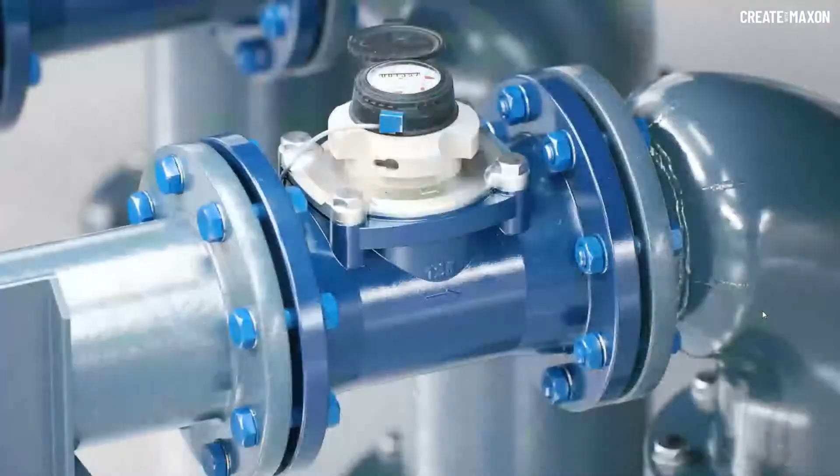Yeah, okay, that's it. I think what you can see here is that we are covering a big variety of things. Like you saw some Lego stuff we do, and then this photorealistic stuff, some commercial stuff. But I think what's most important to say is that all of these projects are commercial projects. So we are very focused on doing commercial projects. It's not that we have a lot of time to do spare time projects.

So our credo is learning while earning, to call it like this. And so we are always trying to get better with every paid project. I think that's a good way to go, because it's always good if you get paid for something and also can deliver great stuff.

So before I start with the topic today, we can switch to the presentation here. As you can see here, the topic today is interior rendering from concept to photorealism. And what you can see here are just 4 images we did in the last months and years, especially for architectural stuff. And I will show you some tricks for how you can achieve this kind of quality, or how we approach such an image.

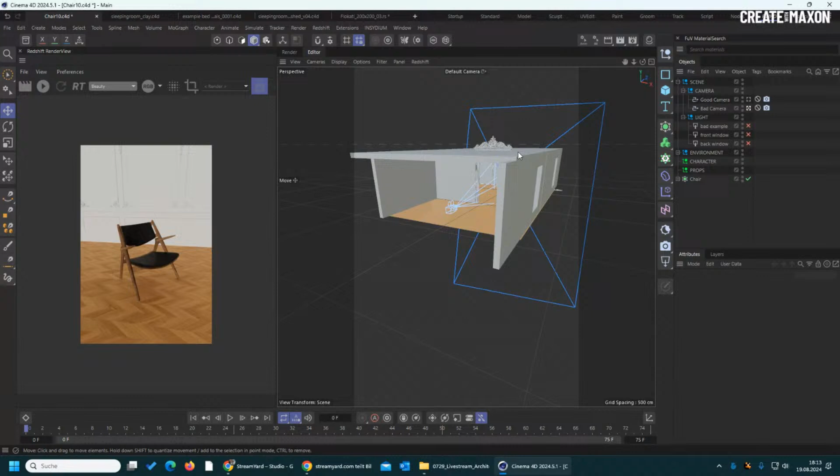So let's switch over to Cinema 4D so I can show you what I mean. I prepared a very basic test scene here. You can see it's more or less kitbashed together. You have some ornaments here, I just downloaded them from somewhere. And we have the door here, and I placed this wonderful chair right in the middle of the room.

So in terms of composition, if we now try to make a good composition just from this chair, I said okay, we can go with a bad camera. I would call this one a bad composition. It's not showing anything, it's like the standard focal length of 36.

If you open scenes from other people, you always see they don't even care about the focal length. They just keep the standard, and that's it, and then place it just somewhere so you see the chair. That's it. And if you now hit rendering, we don't have light here at the moment.

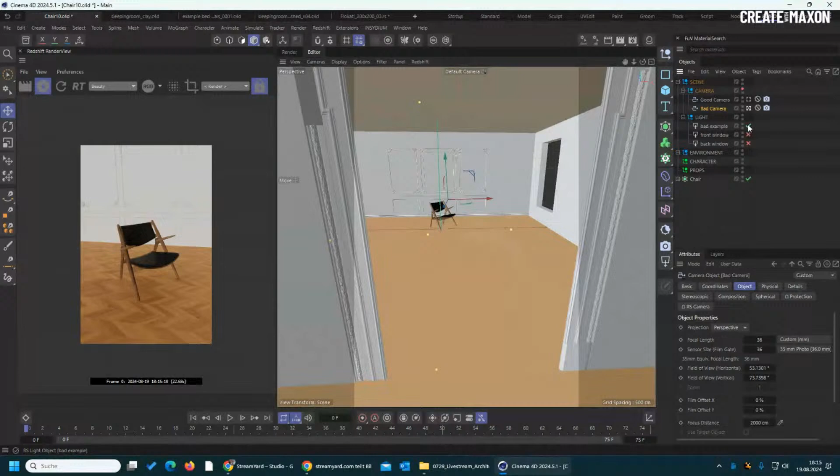The recipe for the perfect bad lighting is to put it right in the back of your camera. So I prepared this here as a bad example. At the moment we have our camera, and the light is coming right from here, mainly directly from the back. What you can see now is we don't have a really good perspective, and we don't have good light, because we don't have shadows - the object is covering all the shadows we get, since the light is coming right from the back of the camera. That's not what we are aiming for.

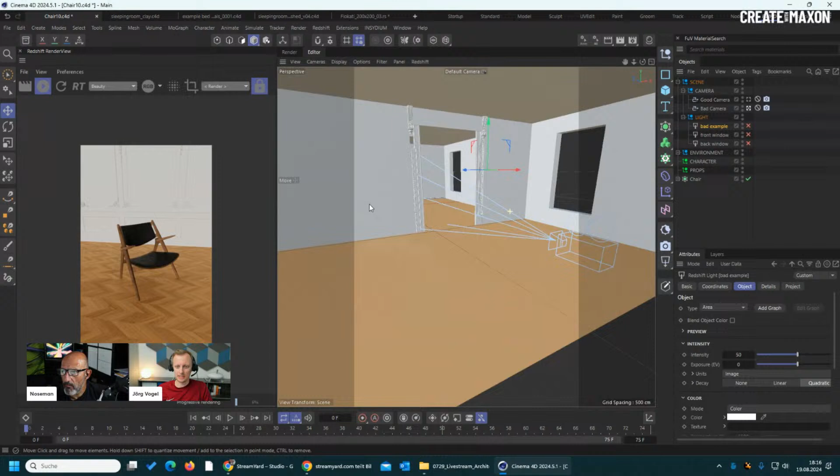So let's go back and think about what could be more appealing. A good way to get a good product shot, first of all, is to have a bigger focal length. So when we start here with a focal length of 150 millimeters, for example, and get a little bit of the door frame here in the front, we get some depth of field, some depth into the image, and it's looking quite more interesting.

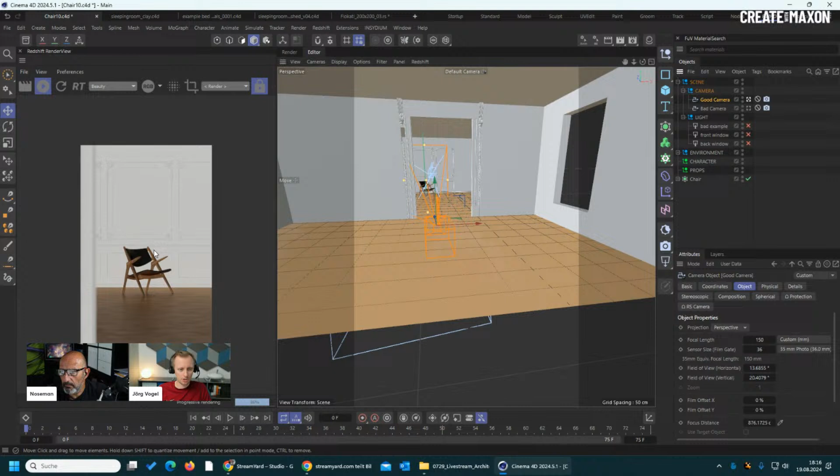What also helps here to get to those perspectives is using the composition tab. You can enable, for example, a grid, and you can center it somehow, or use a golden section or triangles - no matter what, just some helpers that can help you get to an interesting composition.

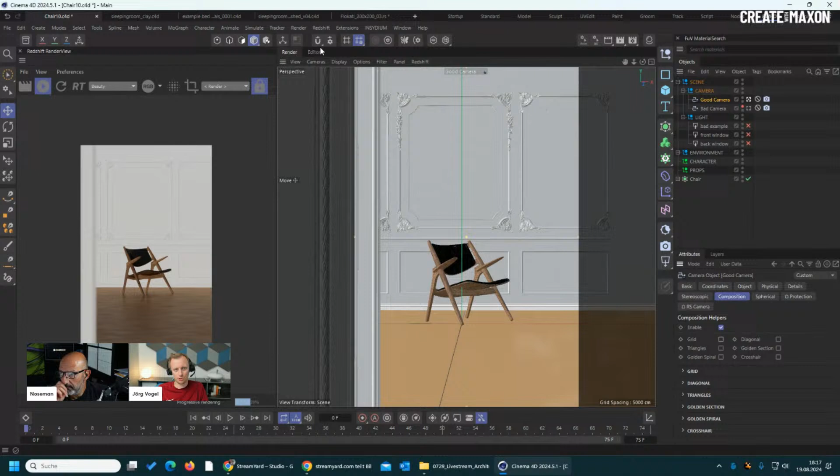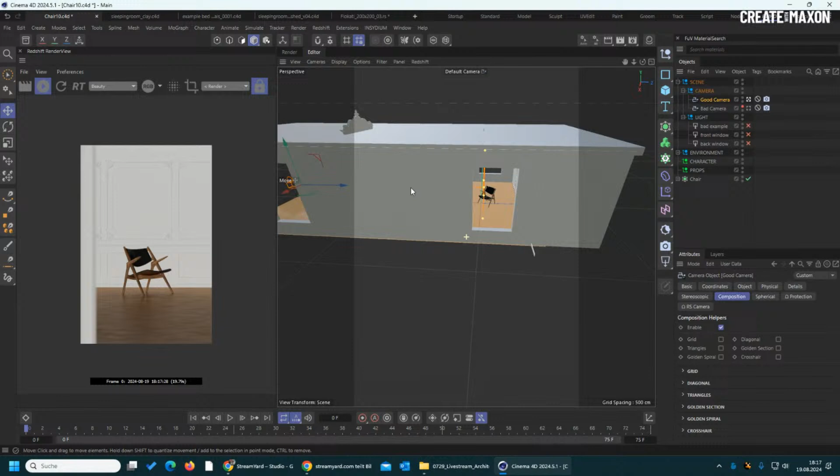So now we have this. We have still auto light, and now what we said is point 2 after the composition is the lighting. So what I did here is we have a window directly from the side, and I'm not telling you that you should always put a light from the side to your object, but it's always a good starting point not to put lights somewhere randomly, but put it 90 degrees to your camera.

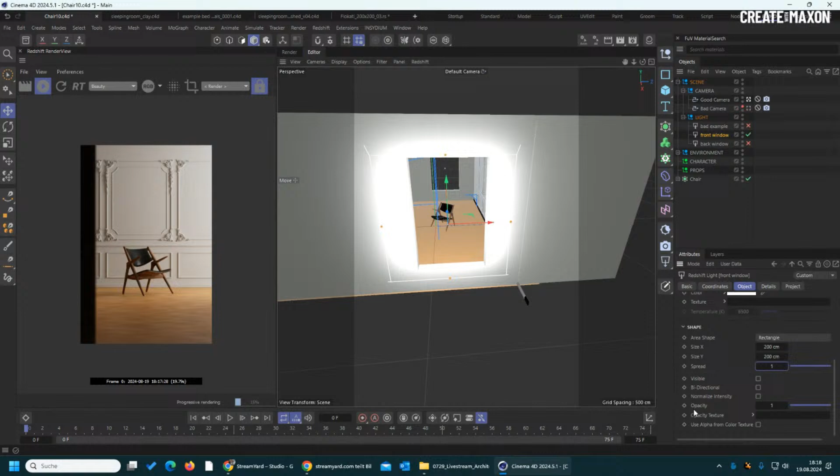This is just a safe way to do something, because most of the time it will give you a good starting point. So I will just turn on a light, an area light. It's nothing fancy, it's just an area light with a spread of 0.5 instead of 1, so it's more focused on the chair, because the spread is not so wide.

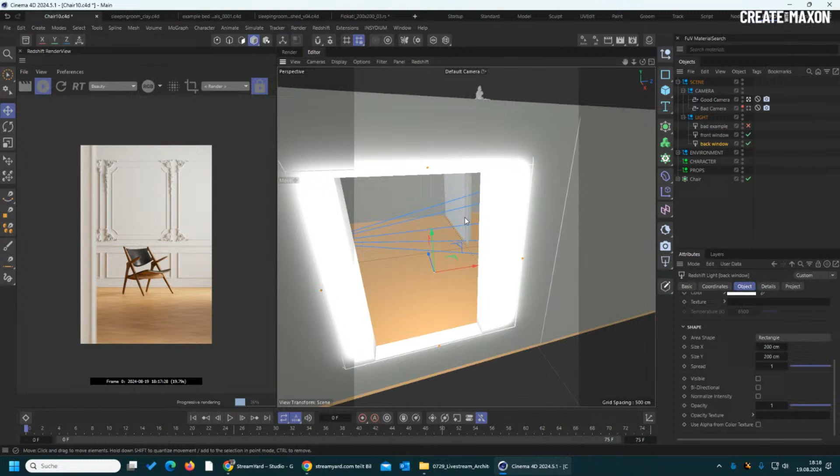We can do it like this, and now you see, okay, we don't have any light in this room, so it's a little bit dark. So we have another light coming from this window, and it will make this room brighter, and we'll end up with a good composition and lighting.

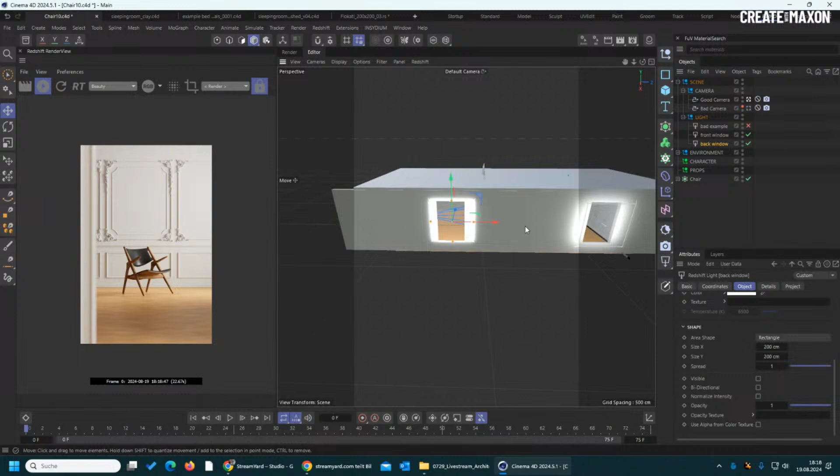It's pretty simple - good lighting doesn't have to be very complicated. It's just 2 area lights, a room with, or 2 rooms with 2 holes - you see it's even open here on the back. I think it's really simple, and you see what's the magic about good composition and good lighting, because it's the same exact object, but you get a completely different type of quality image out of it.

So far for this one - this was a little bit more overall. I will now switch to this bedroom scene we saw here at the beginning, and just want to show you how we proceed with such a project.

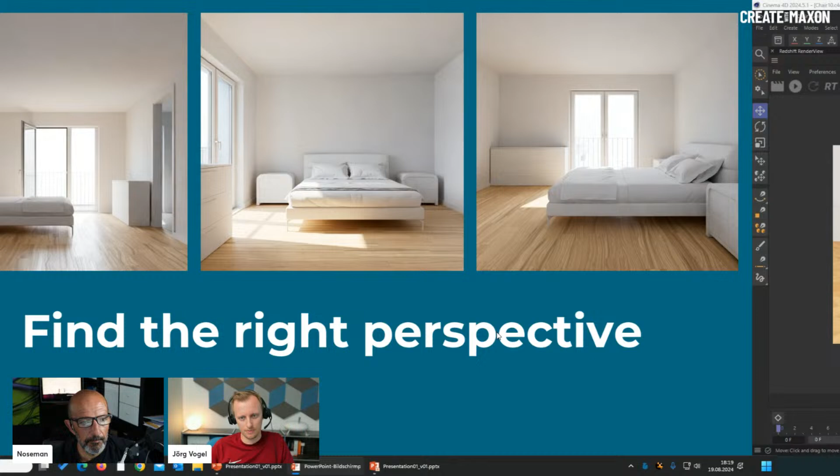Let me switch over here, and we will just start over with a blank scene. I will really show you the basics how we work here. Normally when you start, you need something like a blueprint.

You can just go to your top view, for example, and go to the viewport settings with Shift V, and then go to back. Here, let me just go to this texture - you can just put in some blueprint I prepared, and here you go.

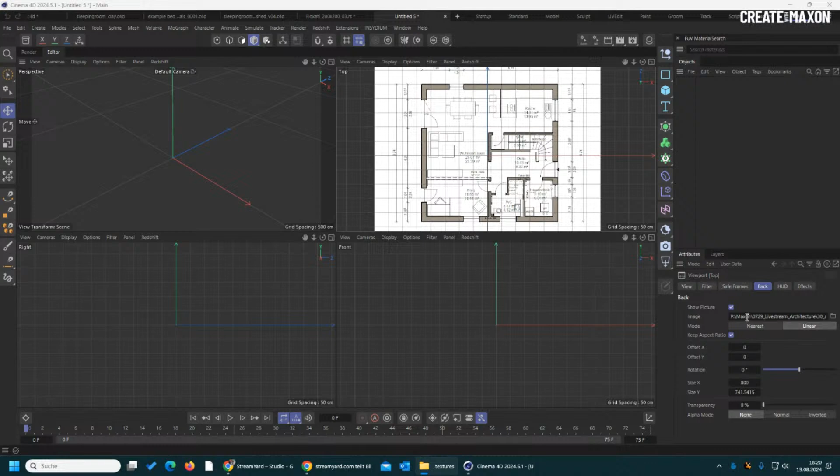Now you can just model your stuff. The problem is that the scale is incorrect. For example, we have here 9.74 meters, so if we just type in here 974, you can see it's totally off scale.

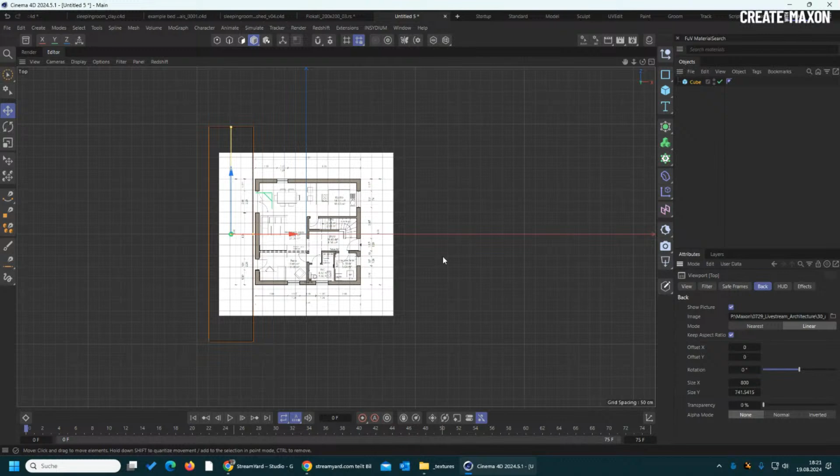We can now go here and adjust the size and the offset, for example, but we find this really annoying. So what we did is, let me just remove this one here.

We have a plugin written, it's called the Blueprint Importer. You can just switch the standard alignment, say put me an image into the luminance channel, and also which type of material you want to use - I would just use the old Cinema 4D standard material.

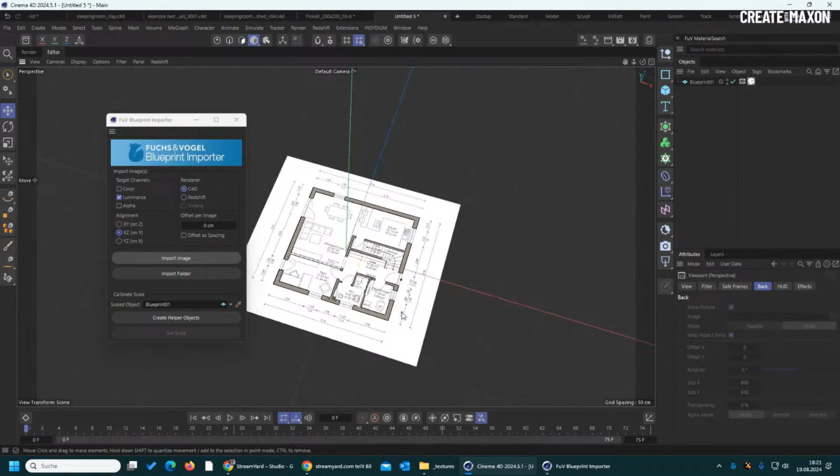Then we go to import image, and here we have the blueprint. Now we have a plane here with the material attached with a display tag, so you can also see it in the top view, for example. It has an override here for constant shading.

But we also have the problem here again that it's not scaled properly. Here we have the create helper object - you can see it's just a null object that appears here, and we can just set it somewhere here, and set this one to here.

So we have now measured the distance here, and then we say just set scale and set this to 974 - I think 974, and that's it. We can just check it by putting a cube here, and you can see it aligns perfectly.

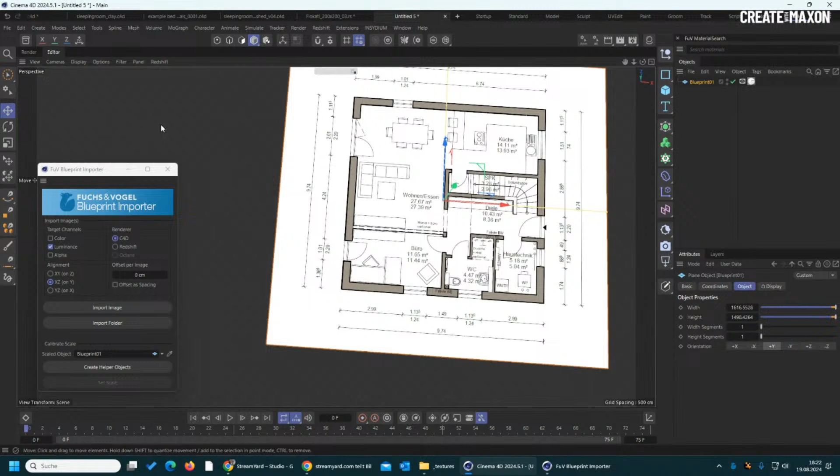So that's step number 1 to start with the modeling of the room. I won't show you how to model everything here - I would just show you how we would build one room, for example, because most of the time you won't show everything. It's more like, okay, let's show the office or the dining or the kitchen.

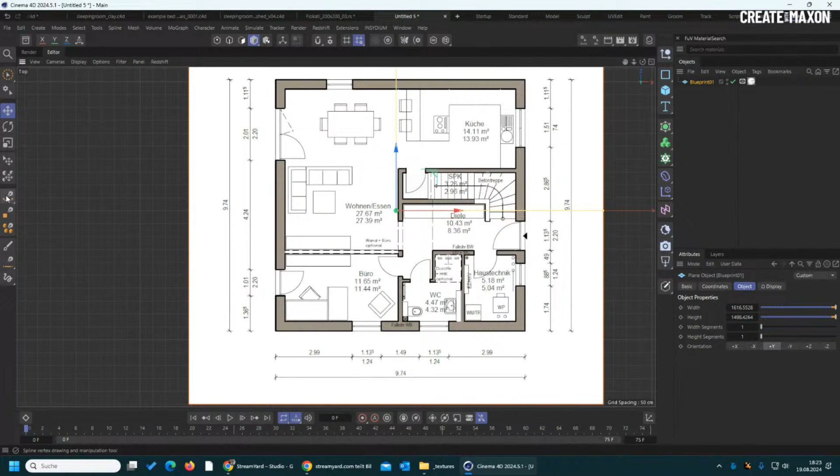So we just do it by creating some spline here, really rough, go to the edges here and close the spline. What you can see now, it's not perfect - you don't have 90-degree angles here.

I think the fastest way to align them is just to copy 2 of them and then scale them - like you click on the smallest one and scale them down and scale them here. As far as I can see, I was pretty good with those 2 because they are already 0.

You could also use the scale tool, for example, just scale it down to 0. Now you have perfectly aligned 90-degree angles - that's really good, that's what we want to have. And now we can align everything here.

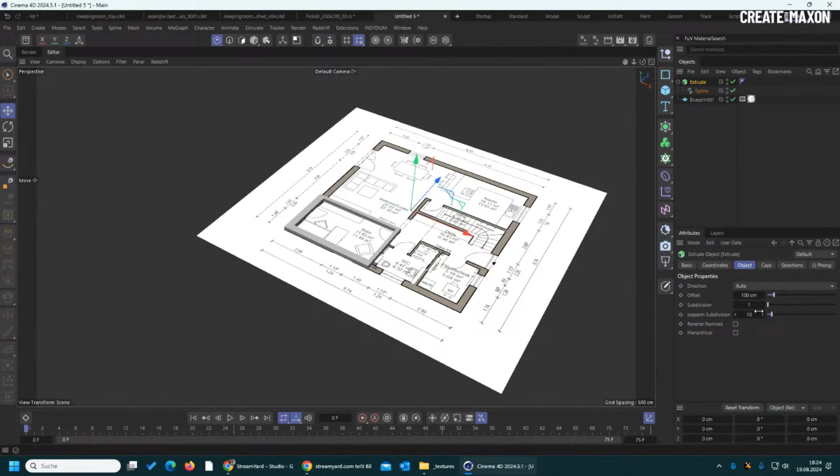Perfect, then we can create an outline. Just need to adjust it here a little bit and here a little bit. And that's it - let's put this into an extrude NURBS, and let's say we have a height of 270 centimeters.

What you see now is it's facing in the wrong direction, but that is not really a problem because we can just reverse the sequence of the spline, and so we get it in the right direction.

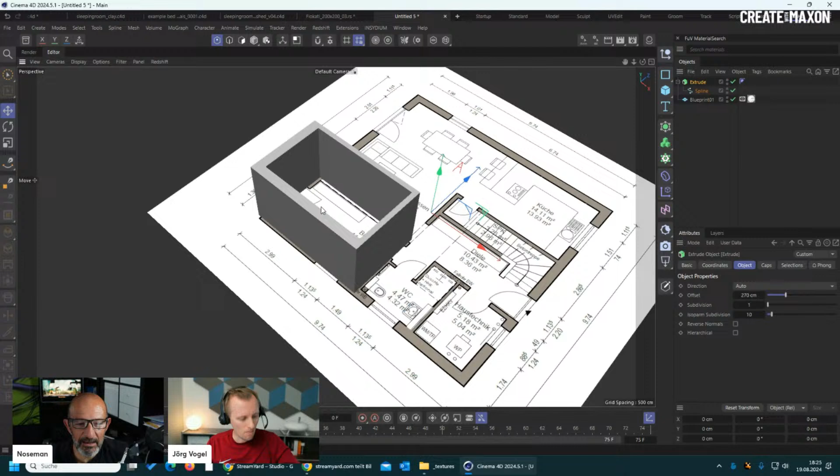One interjection here - whenever someone says to our viewers, I'm going to put it into an extrude NURBS, that means they've been using Cinema 4D for a long time. That's my comment. Yeah, I'm old. I'm trying to get used to the new terms. Okay, so I'm using an extrude. Yeah, great.

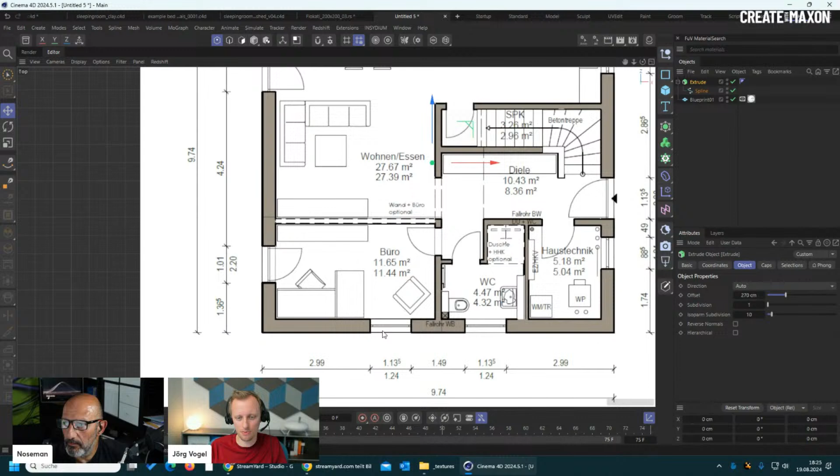So what's the next part? The next part is to put in some holes into the walls, like for the windows. I think we have a door here, and this is also a big window, like a door. So we just get a cube, for example, and we see here that it has the size of 101, and I think the other one should be the height, so it's 220.

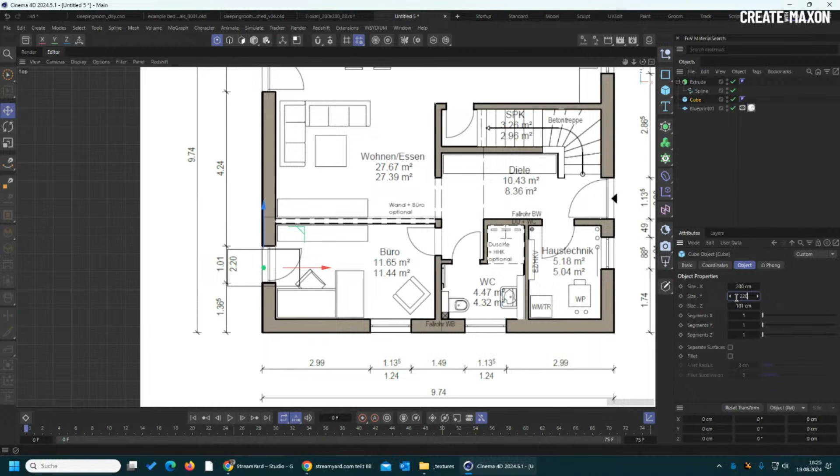And what you see now is that it's not aligned to the floor.

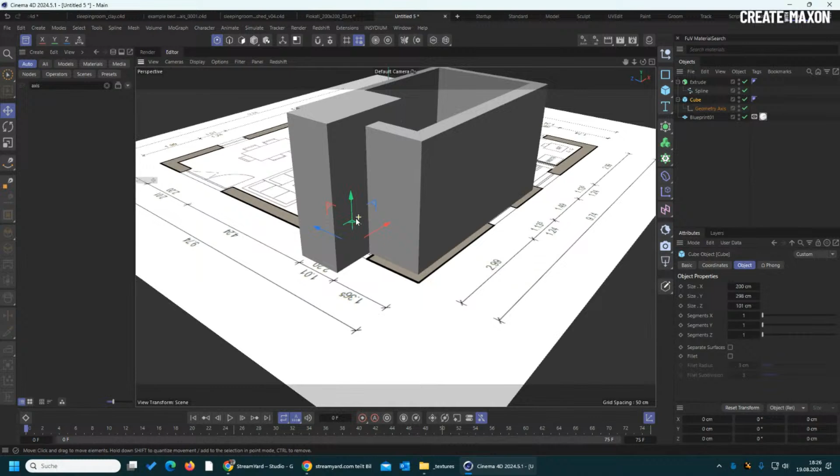So when I'm doing this, you can see it's always spreading in both directions from my axis. So there's a really handy capsule you can use, it's called geometry axis. When you put it here, you can just set the y-axis, so it's just an offset for the axis, but you keep your cube editable, so you can now just adjust the height without moving the cube in both directions. That's really handy for something like this.

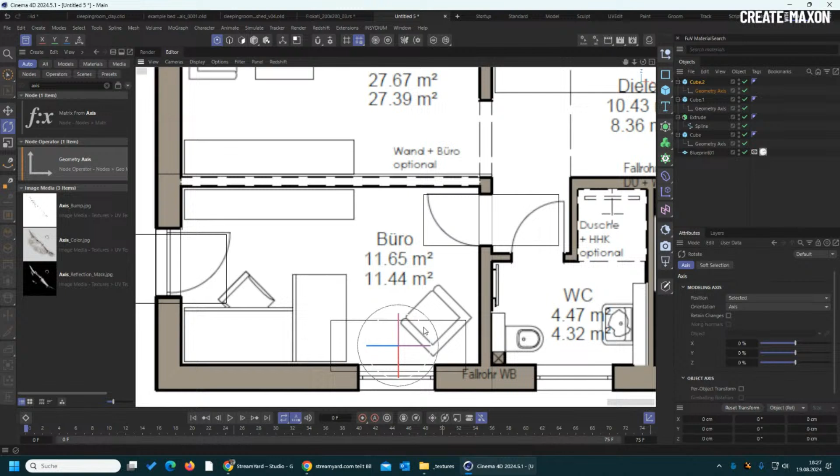So we have this door here. We have the door, I think it's around 75, if I'm right. And the height, we can just leave it, we'll just make it a rough model. And again we have here something like... I don't know, I think that's it. And in the height we have 124.

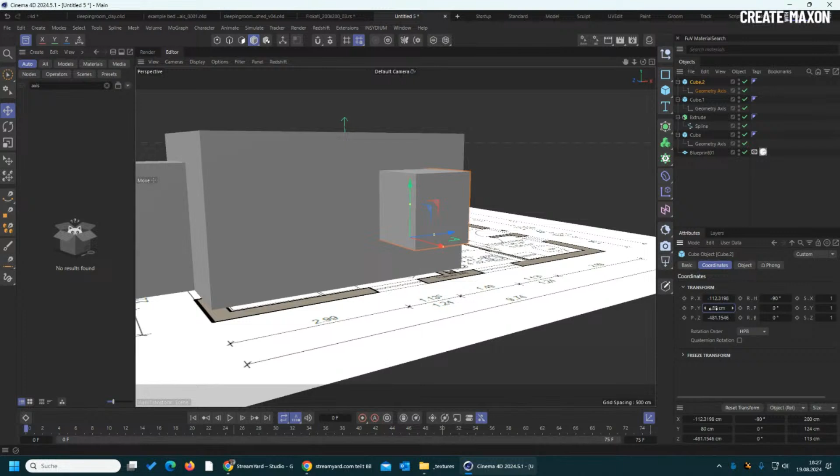Exactly, and I think the window will be at a height of around, I don't know, like put it on 80 centimeters. That's also really handy with this axis too, because you can just move it from the down part of the window.

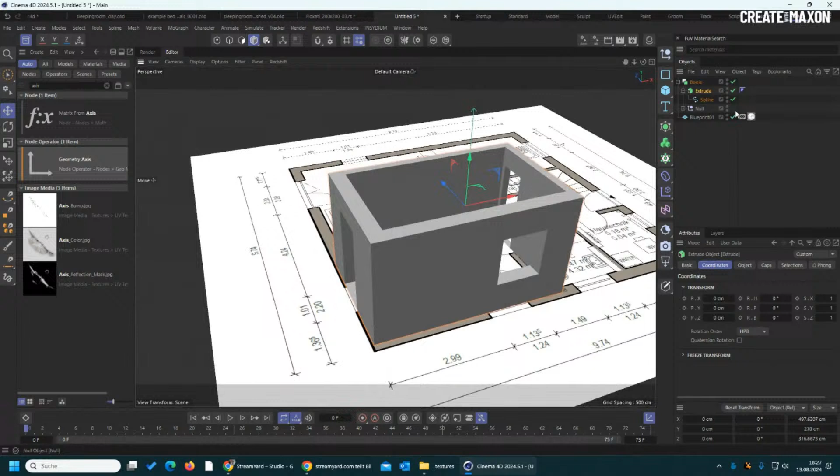So we now take a Boole, and we can just group all the windows together, put them here, and put the rest here, and there we are. I would just pull them a little bit down, so we have gaps in between those doors here. So that's it for the holes, and then we can just proceed with some.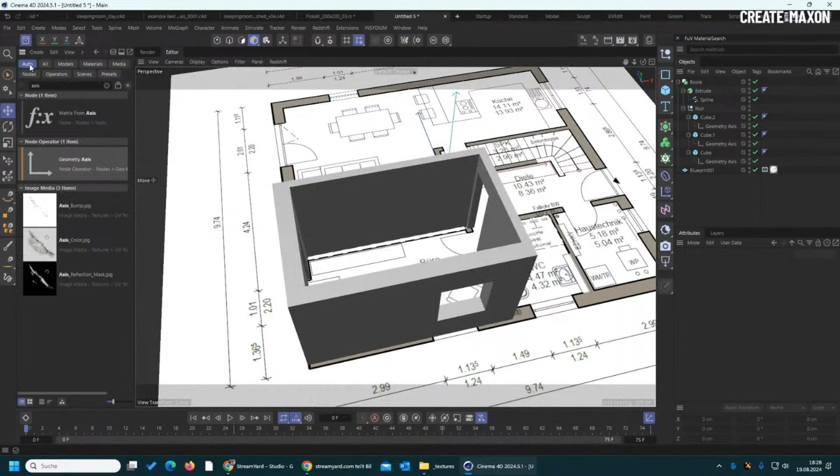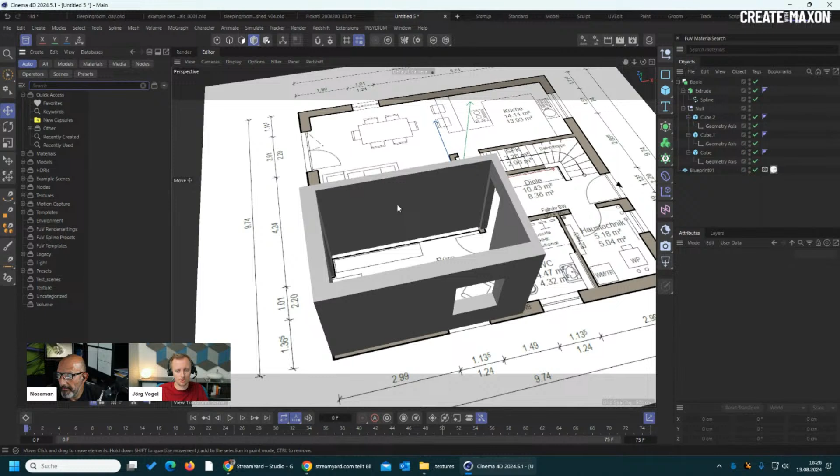I really want to highlight the asset browser here. Like it was a few years ago, there was not so much stuff in there you could really use for commercial work, but it's a really growing library, like with the materials, and there are tons of new models, reworked old models for Redshift, so I really recommend looking at that first before you go to, I don't know, TurboSquid or 3D Sky or whatever.

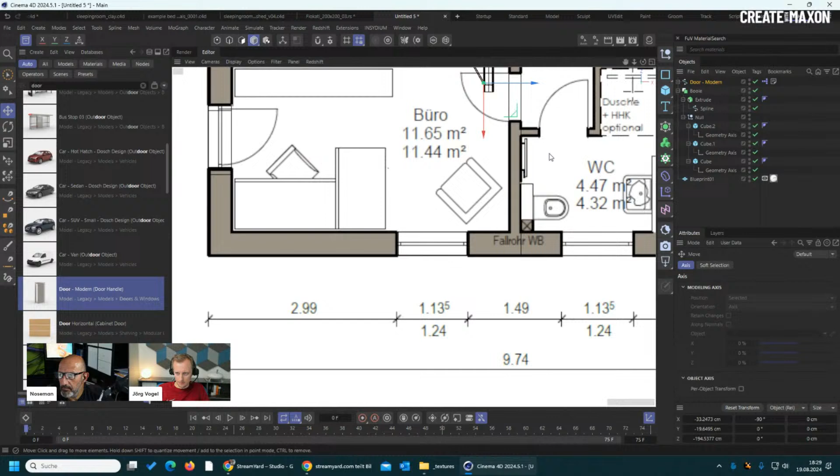So what we can use here, for example, is there's a door object, and that's really cool because you can just align it somehow here. I think it needs to be a little bit... I would just hide the blueprint for this, and we can just put the door...

...somewhere like here, and then it has a rig already implemented, so you can say okay, I'll adjust the width here, and then we also have a slider for the depth, and of course the height.

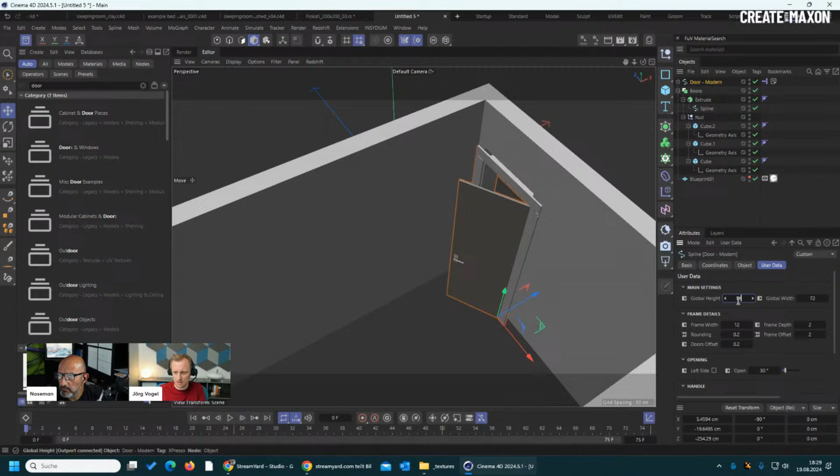Yeah, that was a little bit too much, I think. Yeah, something like this, and that's it. So we already have our door here. You can also open and close it, so that's a really good rig. I don't know since when it's there, but it's really handy because, as you can see here, you can really fast apply your door.

For windows and other things, I just recommend you can build them yourself, or you can go to the internet, there's tons of free stuff, tons of stuff you can buy. Over the years we just built a library of 3D models.

So yeah, we just place some windows there and scale them properly. I won't show this here because that's just getting some models, shading them and dropping them into the scene, that's nothing really special. I'm just focusing on some techniques that can be useful for everybody, and don't want to waste so much time for this.

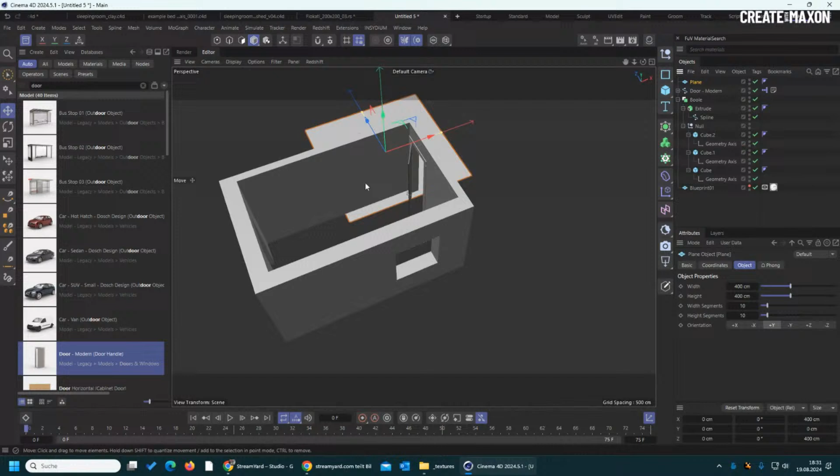So what you can also do here, because we still need a ceiling, we can just use the spline we already used here, duplicate it, and put this one also into an extrude. Yeah, it's important, set this offset to 0.

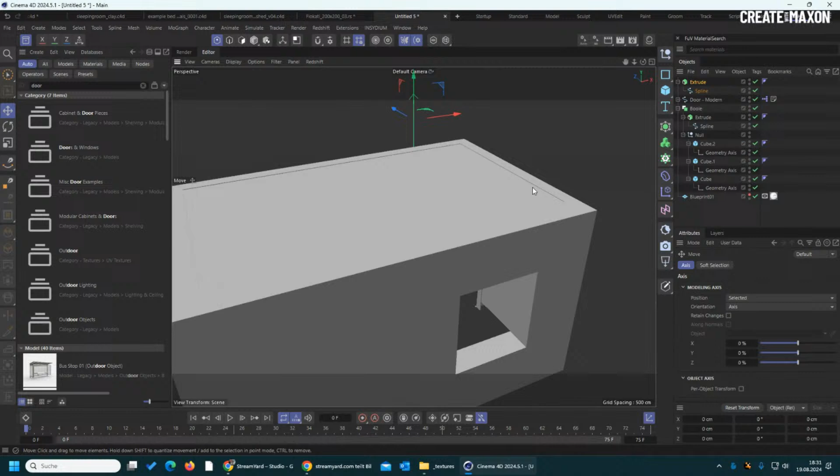And move this one right to the top. We can just move it a little bit like this, so it's penetrating here a little bit. So the problem with ceilings is that they're always in your way when you want to work with it. So what you can do now is...

...which is a really good trick, just go to the options of your viewport and turn on backface culling. As you can see, nothing happens really, but I would just put a cube here on top, so you can see when I'm now looking from beneath the ceiling, the ceiling is gone.

I just see through it, and that's because the normals are facing in the up direction here, and backface culling will just make the back of the polygons invisible. So when you're looking through the back of a polygon, it will just be invisible, and that's just the wrong direction.

So I tried this reverse normal thing, but it doesn't work. So what we can do here also is reverse sequence. And so it's gone, but it's not really gone because you can see it already here. So the good thing about this workflow is you still have the ceiling when you're in a room. That is really good, because otherwise you're just looking into the sky. But when you're looking from the outside, you can see that it's not really showing.

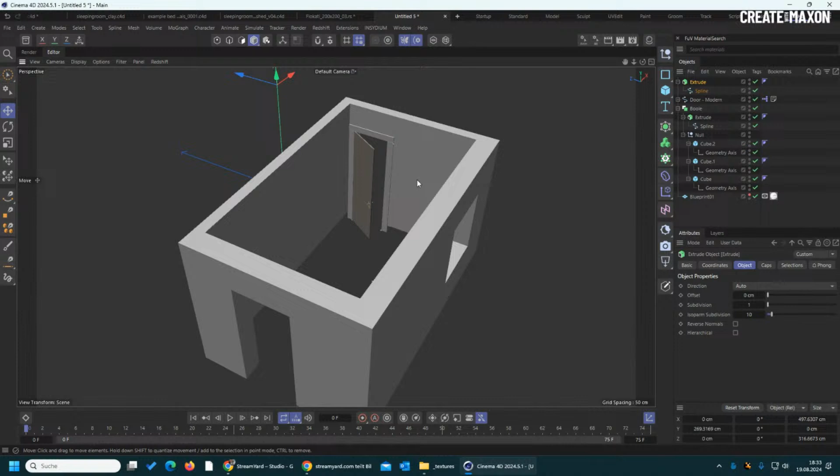Yeah, so I think that's it about the basics on how you build it. What you can also do here, that's maybe something you need, is that you can make this: normally around this edge you have this kind of wooden plank you line here.

So you can do it just by doing a current state to object, take this geometry and then select the edges. So we have all the edges here already, and then we say edge to spline, and now we have a spline. We can delete everything else here, and now we have the spline here, and as easy as it is, we can also add a rectangle here and put this all in a sweep.

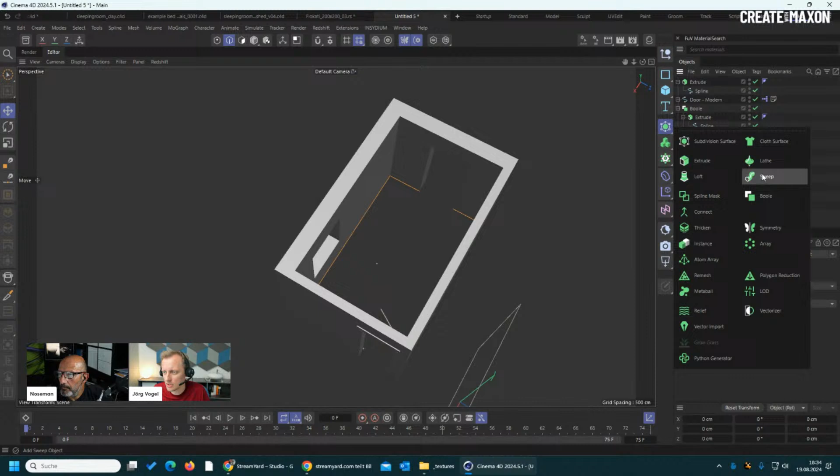So this looks totally horrible. And here again, we can aim for this geometry axis. I will just turn this off here so we can see everything. What we're going to do is just to sweep this rectangle around here, so we get this profile. And to do this properly, we need to put the geometry axis to one of the vertices of this rectangle. And we can do it by just converting this one here and moving the axis around.

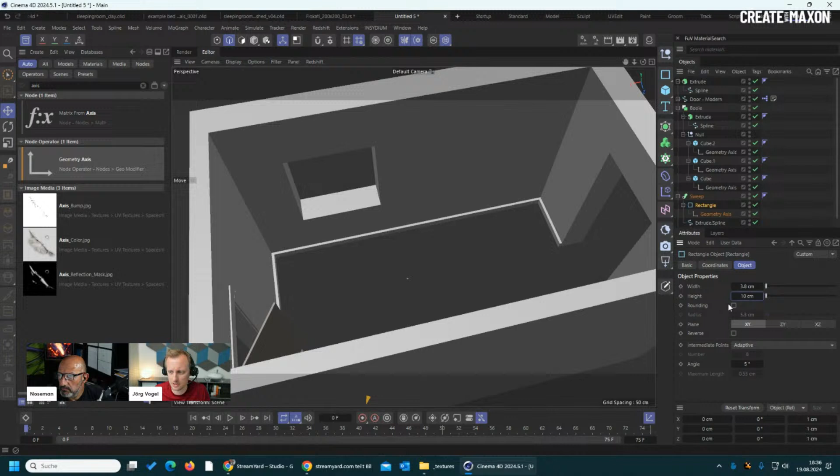You can do this, but I really like this procedural way where you can leave everything parametric as long as you need it. So what you can do here now is that you can just move the edge around and then turn it on again. And as you can see, we can now adjust this to something that's making a little bit more sense. For example, you can add some rounding here and maybe adjust the phong angle so it's breaking correctly. And so you now have this socket here around your room.

Now we need a floor, but normally you can just take a plane and that's it. Take this for the floor. And I think that's it. We are now ready to proceed with the next step, and the next step would be to get a good perspective. Maybe that's a little bit not usual, but before we start looking for some reference image, we first try to find a good perspective in the room. So after that, when we know what we want to show, we can use some reference image that's exactly aiming for this outcome.

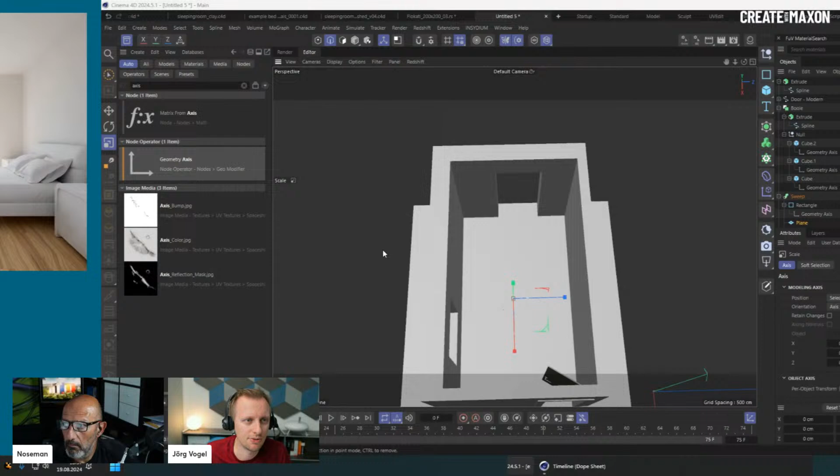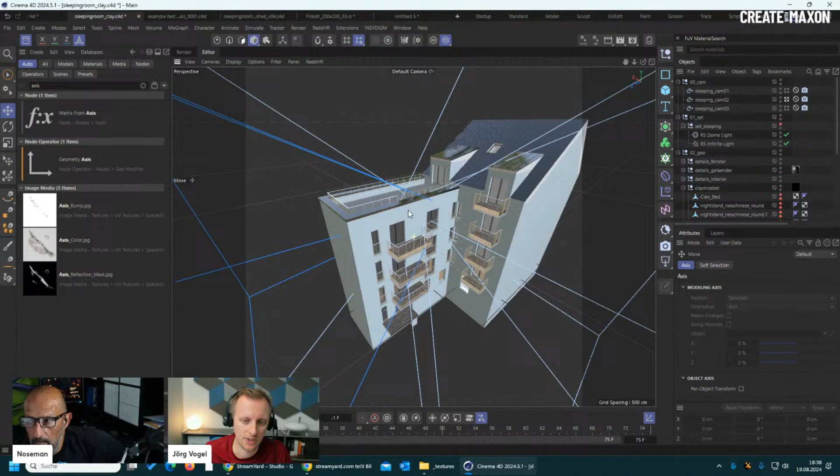So you can see here that we had different perspectives. I also have prepared this room. As you can see here, this is already a completely built house. We haven't only built this one room, but that's not because we have to render every room. We got some data from the architects, so we already had this, and we had to render also outside images. So if you have everything already, you just take this room and that's it.

So what we were trying here was to just find some camera angles, and as you can see here, it's a typical Munich housing because everything is very small. And as you can also see here, even if we are looking into the room, most of the cameras are outside of the room. I think this one here is the wall of the room, and you can see all the cameras are outside of the room.

So how does this work? Normally when your rooms are big enough, you don't have a problem. But in this case, especially when you're visualizing buildings in Munich, because it's so expensive, they're just building small rooms.

So what we did here is, you can take a small focal length. So that's the first thing you try. But when you're going under 20 or something, it's just distorting everything. You will see this as soon as you put some stuff in the room. So just lowering this is not really an option.

But what we did here, and what is really usual for this kind of visualization, is that you can go into details and enable the near clipping. And what it's doing, it's just clipping away things that are in front of your camera. You see this when you're sliding down. So actually the camera is outside of the room, but we are just clipping away

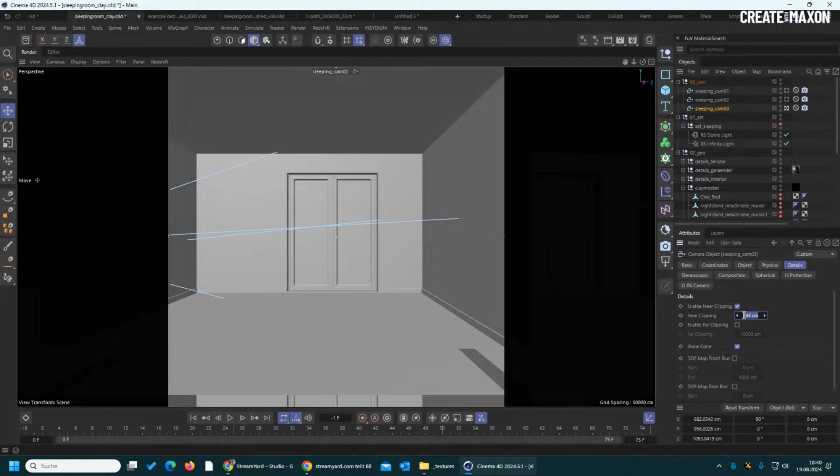the stuff. And just as much as we need it, because otherwise when you do it too much, you see you're also clipping away stuff like the floor or anything else. So just clip away as much as you want, and we did this with every camera, as you can see here, because otherwise there's just no way to get a good image here.

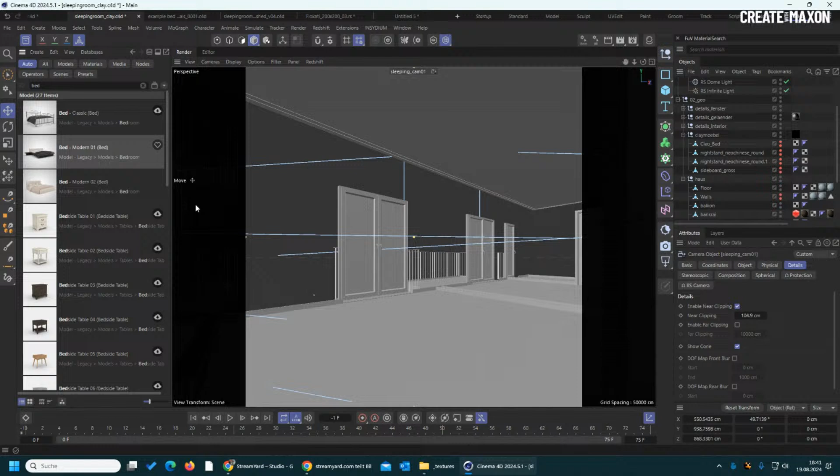And we also have some furniture here that can be really rough. So what you can do here, for example, is go to the asset library and, when you have a bed here, I just have to turn off the walls temporarily to place it. And we can just take this bed here. And you already see that it's really small inside of here.

So we can just take this one and put it right here. Maybe check some other perspective. You can see it's really small in here. So maybe we are aiming for a smaller bed. We can just scale it around. And what I also do at this stage, we can just select child tags of the same type here and get rid of all the materials.

Let's try it again. Yeah, so like this. So we're just working with some clay models, and as you can see here, you can just populate it with some stuff because it's not really important what's in there. It's just more about having some placeholders for a bed, for a cupboard or something like that. So this was what we were doing here.

Like you have the sideboard, you have those small things, and then you have this bed. That's all. We just put it in there to get a better feeling for the room and for the camera angles. And we proposed to the client those 3 cameras, and he decided for this one.

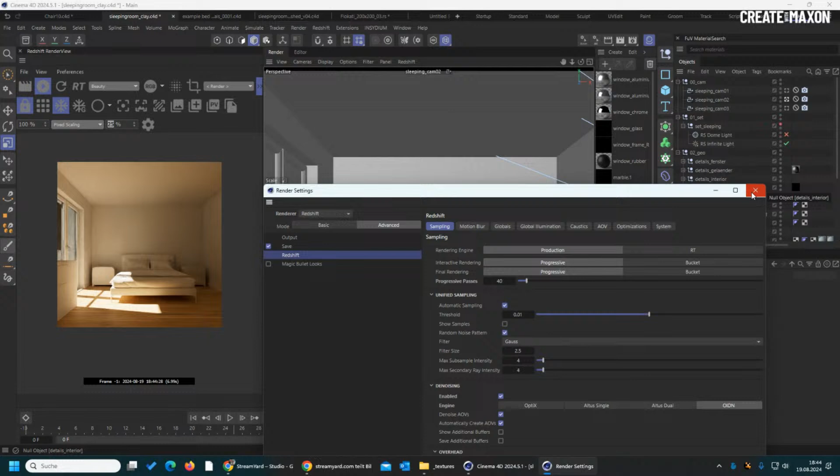And if you're wondering why that's rendering really fast, it's just because I'm using a denoiser here, because that's totally enough to judge the image. So we have render times of 7 seconds. That's totally enough. So this is just an infinite light here with some color in here. It's not even a light temperature.

We just put in a color that looks good and is not too oversaturated, because then everything is getting yellow. And the other light here is just a dome light with a little bit bluish color. So if I turn this on, you can see it's a very diffuse light, and it's really cold.

And what we have now is, when we combine both, we get this warm light from the sun, but we still have some ambient bluish cold light from the outside. That makes a really cool look, I think. And we have the flexibility for the light without having to worry about things that are changing. Like when you're using a physical sky and sun rig, it's always like you change the angle of the sun, and it also changes the sky, and this also changes the light color and everything.

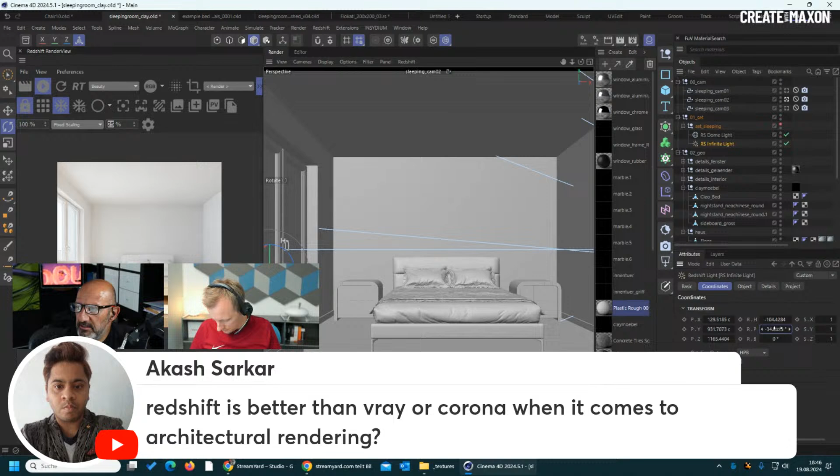We have a question, yeah Jörg. So Akash is asking, is Redshift better than V-Ray or Corona when it comes to architectural rendering? And I could rephrase this as, why is Redshift your preferred renderer, and how does it compare to other third-party renderers? Yeah.

I personally cannot really judge about Corona or V-Ray. I think these are both very good render engines. It was just like we switched from V-Ray, like, I don't know, 10 years or 8 years or whatever ago, because there just wasn't a good implementation in Cinema 4D. I think that has changed a lot. A big part of our business is having a library. So when we switched to Redshift a few years ago, we were just dedicated to this render engine, and we put all the effort into building up a Redshift library.

So I think it's not really, that's what I was trying to point out, it's not really about the render engine at the end of the day. If your composition is not good, if your lighting is not good, if your modeling is not good, if your materials are not good, you can use whichever render engine you want. It won't get you a pleasant output. So I don't think one render engine will perform better than the other one.

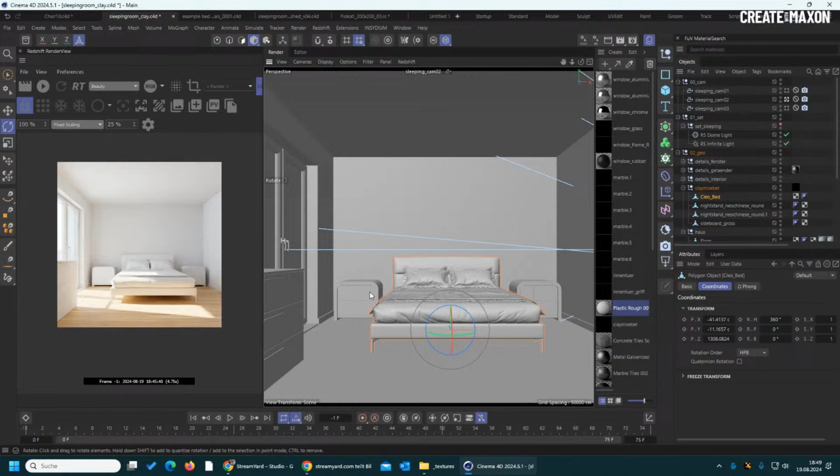All right. So we now have the perspective, and as I said, we just started over by deleting everything again, because these were just stand-ins like proxy geometry. You just need to get to the right perspective. So we were going with the middle one, as I told you.

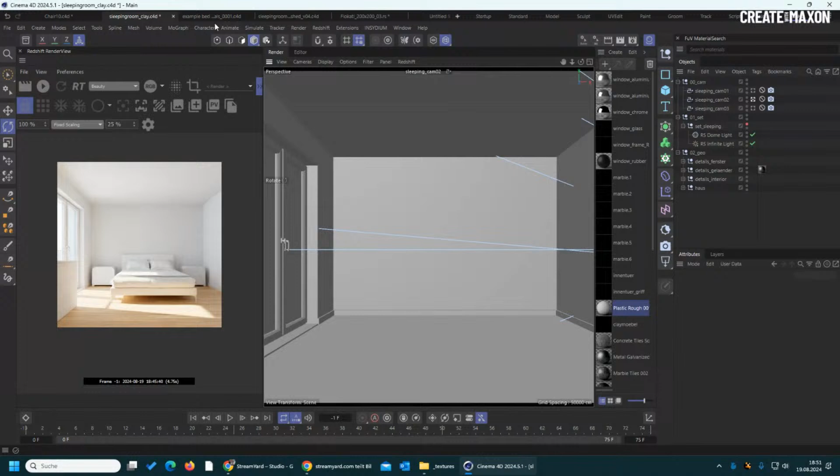Yeah, so we were looking for some sweet spots in every image, and we're trying to aim in this direction. So let's go over it again. And so we are now at the point where we need models and where we need textures.

And I think most of the time, when you're doing this, you're going, for example, to TurboSquid or 3D Sky. We buy a lot of models there, and there's no model that is optimized for Cinema 4D or Redshift, so you have to recreate all the materials. So what you're getting is a model and then a ton of textures, and you need to create a material, put all the textures in here, relink them, adjust them so they look good.

So that's really when you start over with a bed or something and you don't have a good one already in your library. It's buying this model, exporting the model so it has proper UVs and quad polygons and so on. And after that, you create all the materials. You can be stuck there for 1 or 2 hours just to create a pleasing model with some textures.

So what we did over the last year for Maxon was to create really good materials. And I don't say that just because we did it. It's just we put a lot of effort into making them work in as many situations as possible, because that's really critical for materials. A lot of materials work in a tiny sweet spot, but if you zoom out, they are tiling and so on.

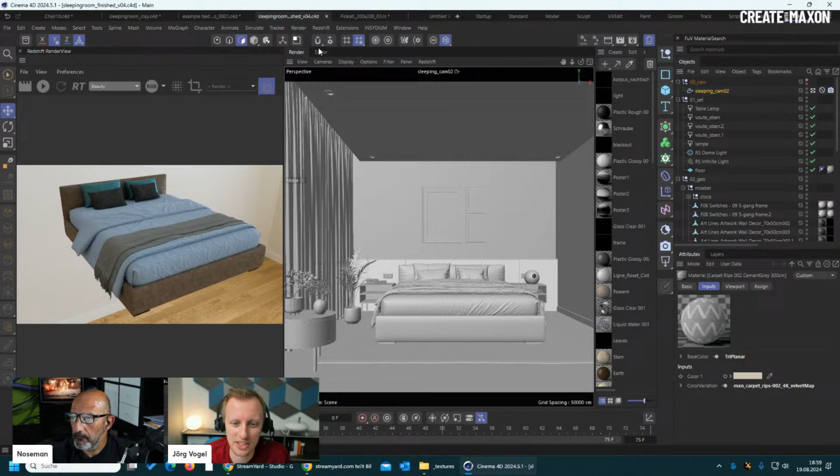So let's just pause this here and go to the next step. This might be a little bit of a hard cut, from an empty room and some kind of clay bed here to the actual room. But I think our time here is also limited and we need to proceed.

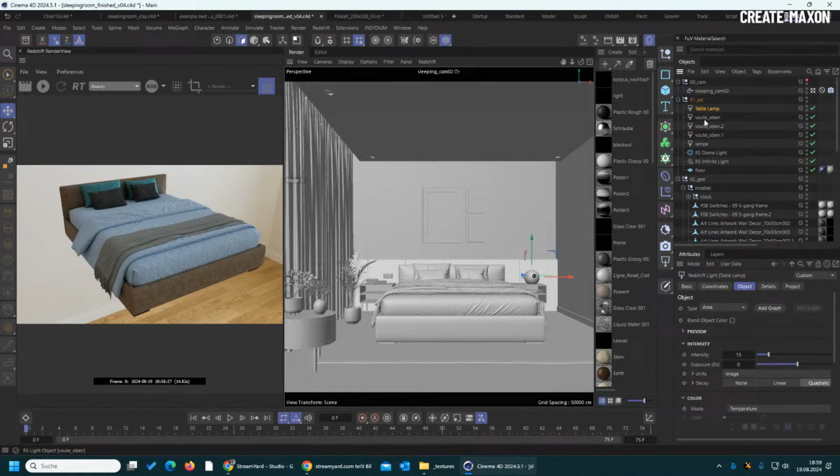As you can see here, this image at the end was just a cube here somewhere in nowhere, because the lighter your scene is, the better the performance, and that's it. So what you can see here, we just put some kind of bed here. We also have some indirect lighting coming from the top. I would just start the rendering. I also have the denoiser active, so you can see.

So as you can see here, a lot of elements we had in our reference we tried to replicate here, because you're 100 times faster if you know what you're aiming for and not trying things out in 3D. Because then you put some effort in shading things and then you are like, nah, it doesn't look good, and throw it away. So you will waste a lot of time.

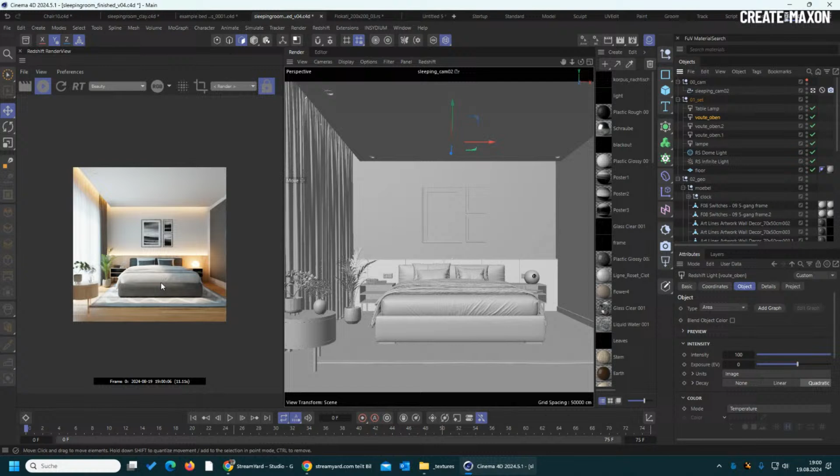So it's always good to have some really good references. You can just use image search on the internet, or take your own pictures, or use AI. Totally free, but the better your reference and the better you know what you want to achieve, the faster you will be and the better the result will be.

One suggestion before you move on. I used to do that when I was in the UK. You go to any secondhand bookstore, and you can find some old architectural catalogs that have some beautiful images from different eras. And these books are usually extremely affordable because they're used and they're old. But the amount of reference you can get from older picture books is amazing.

Yeah, I can totally second this, always aim also for old stuff, because in terms of photography and composition, nothing has changed over the years. A good image 20 years ago is still a good image. Yeah, that's a good one.

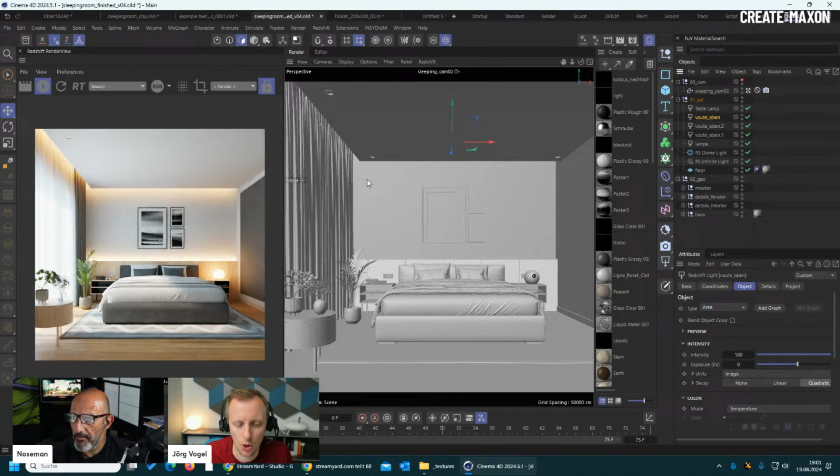All right, so now I will not really focus on the big setup here and the materials we use. I would say 90% of the materials we used here are just from the library, so it's nothing special. We also have some rug materials here, like what you can see here. I'm not sure if that is exactly from the library, but we have some really good rug materials here, and just put them on some kind of extruded plane, and it will work. That's the good thing about it.

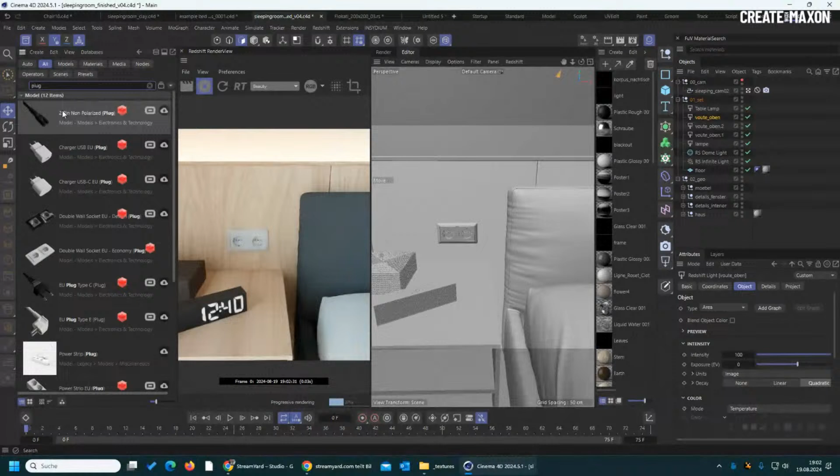You also have something like this, those plugs. I know I'm repeating here, but you can just go here, take them, and you will automatically get the placement tool, let it go, and you have some stuff directly placed on the wall. I think it couldn't be any easier.

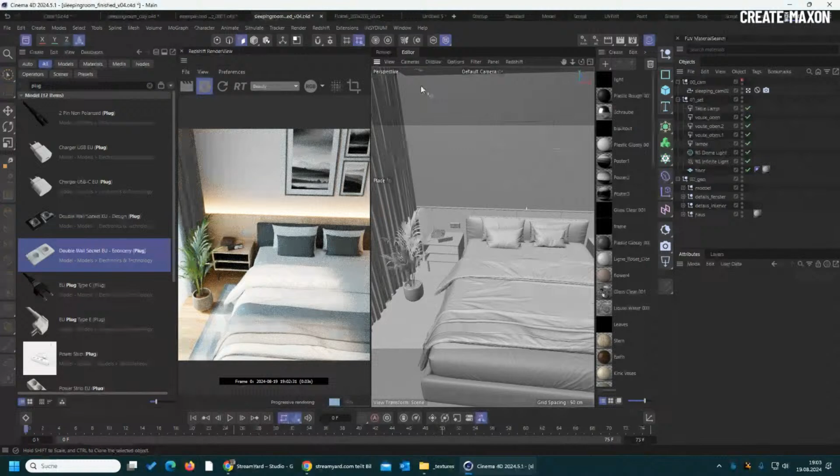So what I want to show here a little bit is what we were doing for the light, like what I already showed in the previous scene. It hasn't changed a lot, but we just added a lot of artificial light from the inside. If you can see here, this is just the light coming from outside, and it's already looking quite good, but it's still a little bit dead.

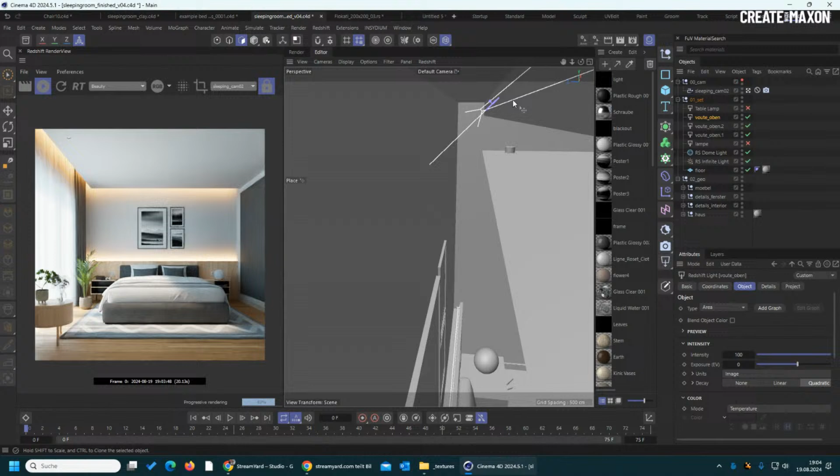So you'll always want to turn on lights in your architectural visualization, because this brings light and life to your scene. What we did here, we just have these indirect lights. We have one at the back from the bottom, one coming from the top. It's nothing really, not a big magic - it's just an area light pointing to the wall, a small area light pointing to this wall, and then we have an area light here pointing to the curtain.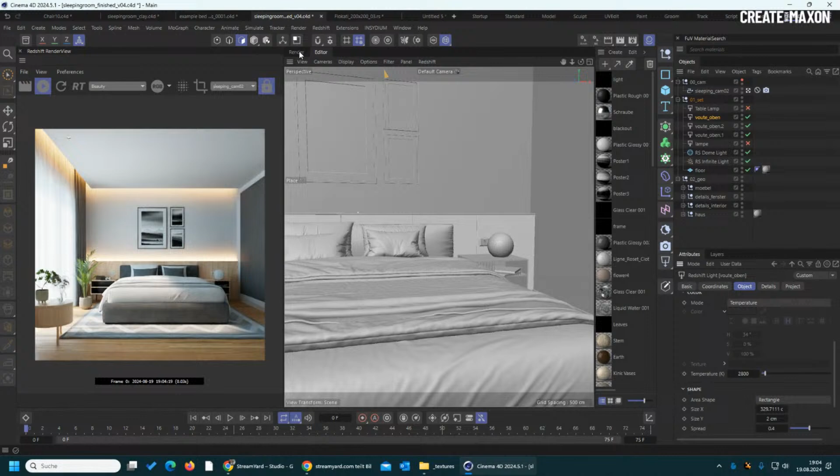So you get this kind of stuff, and they are really warm - we have a temperature here of 2800 Kelvin, that's really warm. That's what I was talking about, when you know what you're doing. As you can see here, that's our ambient dome light, it's really blue, but it gives a really good contrast to this really warm sunlight. So mixing the warm sunlight with this blue will give you this really cold look in the indirect lighted area, but still a warm look where the sun comes from. So that's it.

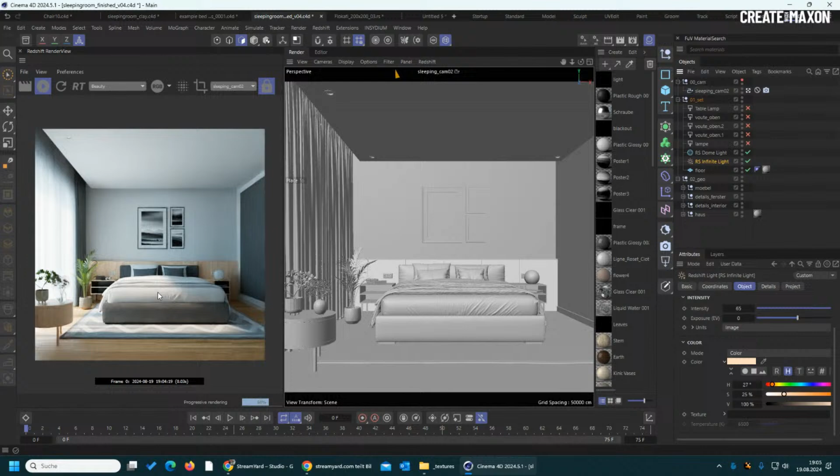And then we have this table lamp here, this is just a mesh light. And we also put a small light here in front of this, in front of the normal lamp you can see here, just to make a little bit more light in the room, just fake it a little bit.

So we can maybe make a quick comparison - this is without, and this is with. You see that it's just making it a little bit more warmer in this particular part of the image.

Yeah, and that's it overall. You can just put it right there, and at the end there will be some post-production I can show you, but maybe that's something I will cover in the next stream we have, in 3 weeks.

But what I want to show you here is another thing that is really good, because I think when we announced the stream, I also wanted to show different lighting situations. You have this, I would call it a day situation, even if there is a lot of artificial light inside here. But what about a night situation?

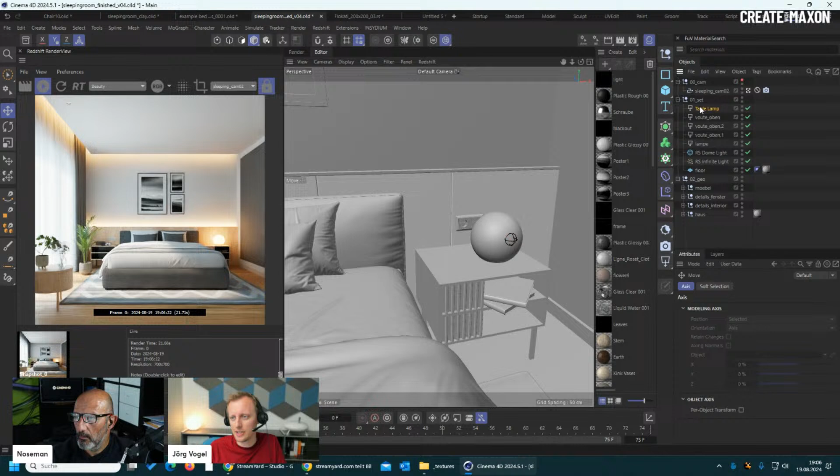So now we can go here and adjust the lights, and of course we can do this, but there is also another way how we can achieve it. A good thing we can do are light groups. That's really cool, because you can group your lights and make some AOV passes that just include the lights you put into the group.

So what I did here, I made a group - you can just click here and create add new light group, then put in a name like 'test', and that light will be added to the light group test. I added it back to the interior light group, adding every interior light we have here into this AOV interior group. Then I have this group called sky, and this group here called sun.

So what I'm doing with all this, when I go to the Redshift render settings - first of all, normally it's on basic, so you don't see any AOVs. So go to advanced, then you have the AOVs here, and you can go to show AOV manager. What we want now is to render the beauty pass, normally that's on all, and we want to render all the light groups - we can tick them each other, or just say all light groups. So it will render all the light groups here.

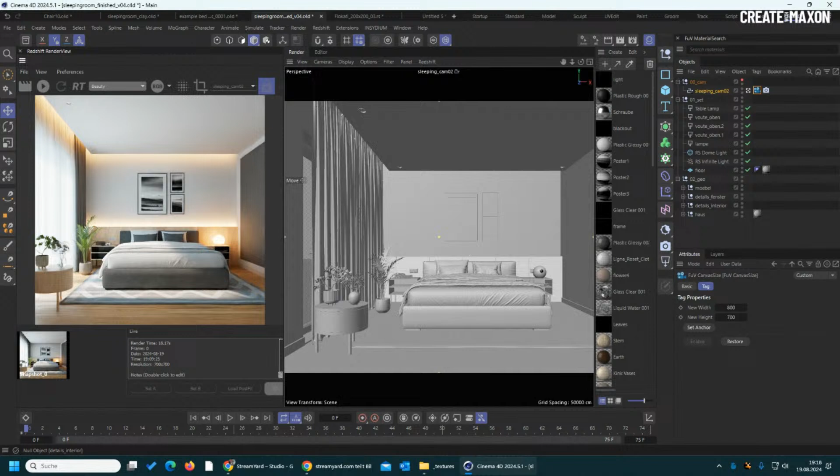And we also have our Flokati carpet package available. It's volume 1, even there is no volume 2, but maybe at some point we will release some volumes, I don't know. What is really cool about this one is that we can see here that we have a bunch of carpets in different sizes already as Redshift proxies, with materials applied and everything.

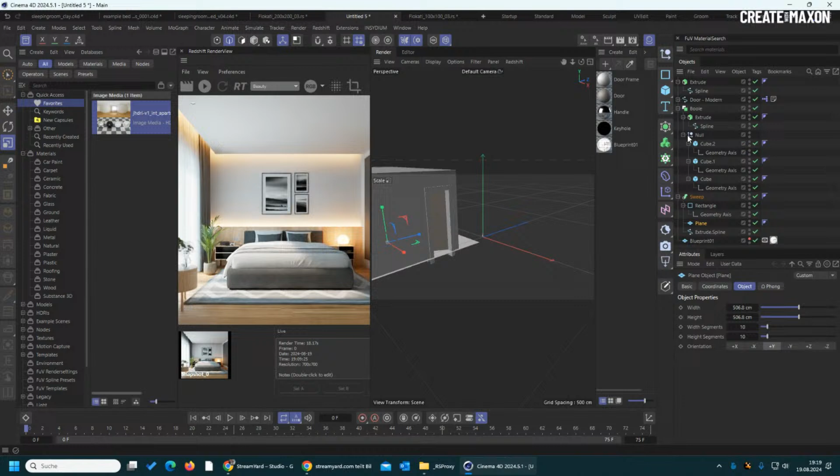You just drop your proxy here, and then you go like I showed, put in a light... or not, I don't know. Did you break it? Yeah, maybe I broke it, I don't know. Never mind, we just take this one here. There it is, yeah, there it is.

As you can see, they are already pre-compiled. It's very fast, it's very detailed. You can see it's really detailed hair. We have these going from 60 to 90 centimeters up to, I don't know, like 3 to 4 meters, and they are in different shapes, like a round one. It's really good if you need some realistic Flokati carpets in your scene, it can help a lot.

You see we scattered them and prepared them. It's like millions of hairs there, and paired with some good lighting, it will really give you a little bit of realism in your scene, because it has a lot of details.